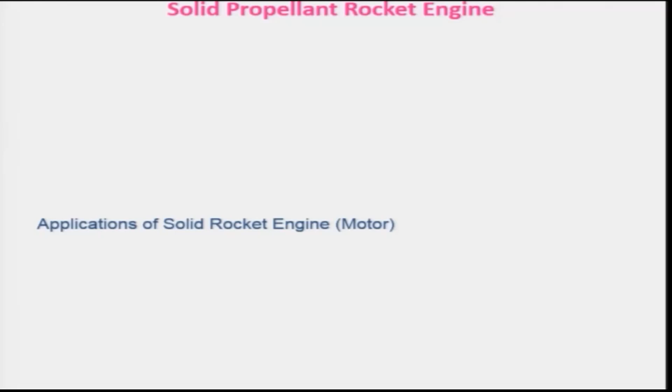Let us look at some of the applications of the solid propellant rocket engine. Keep in mind that the rocket engine is sometimes also known as a rocket motor. So, we will be using engine and motor interchangeably in this course. As I mentioned earlier, solid rocket engines are basically used as booster rockets, which can be strapped on to the main rocket engines, particularly for space launch vehicles. It has been used in our PSLV, GSLV and other engines.

And booster rocket means basically it can provide high thrust for a very limited time, and that is the beauty of the solid propellant rocket engine, that it can provide a very high thrust, although its specific impulse is in the lower range as compared to liquid propellant rocket engines. In modern times it is also being used as an upper stage propulsion system for orbital transfer vehicles, because one can store the solid propellant for a longer period of time, and also it is very simple to design. Besides this, it is being used in spin and de-spin systems for spacecraft.

And solid propellant rocket engines are used for strategic and tactical missile propulsion systems, because of their simplicity, and one can operate them at any time. There is no gestation period for firing a solid propellant rocket engine. And these engines are also good candidates as gas generators for starting liquid rocket engines, pressurizing liquid propellant tanks, and any other place wherever it is required.

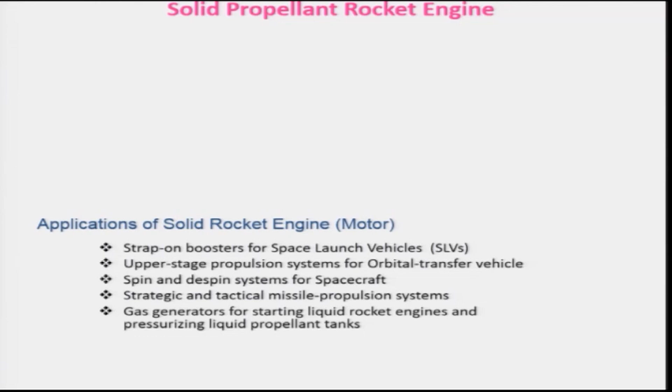And let us look at a typical rocket engine which is shown here. You can see that it has various components, and the main component you can look at is the casing. This is the casing part in which the propellant charge, which we also call the grain, is housed, and it also has an igniter somewhere in this region, which is meant to initiate the combustion of the solid propellant.

So, therefore, in case of the side burning propellant grain, it is placed on the forward side of the propellant, and on the other side it has a nozzle. Of course, the seal has to be used properly, otherwise there will be leakage of gases from this combustion chamber of the solid propellant. So, the nozzle plays a very important role, because in this nozzle the high pressure and temperature gas is expanded to produce the requisite thrust.

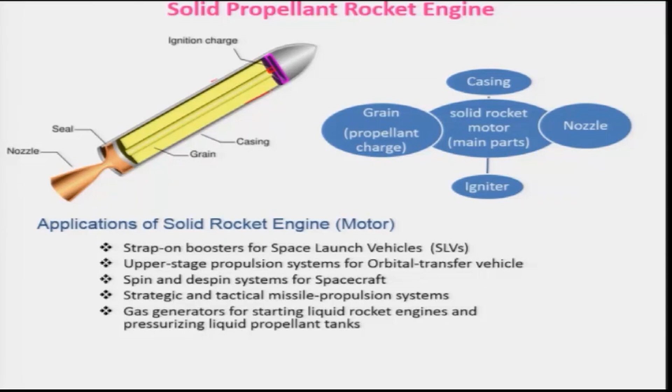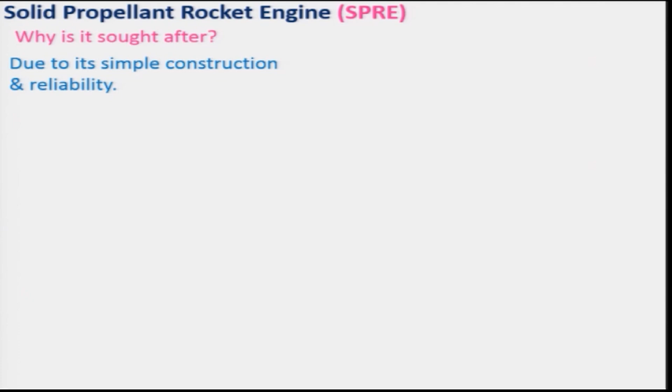Let us ask a question: why is the solid propellant rocket engine sought after? As I told earlier, it is very simple to design and fabricate, and its reliability is quite high. Therefore, it is being used for various applications, and besides this, one can have a solid propellant rocket engine from a very small size to a very large size in terms of thrust. Of course, its specific impulse is a little lower as compared to the liquid propellant rocket engine.

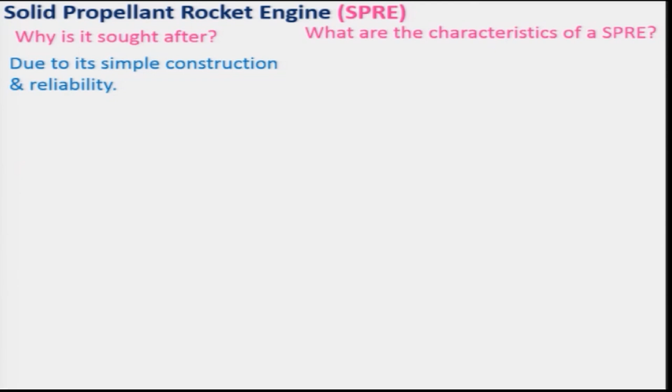Let us look at the characteristics of solid propellant rocket engines. As I told earlier, the solid propellant rocket engine is basically a very simple system. It produces a medium level of specific impulse, from 160 to 320 seconds. A disadvantage of the solid propellant rocket engine is that the fuel and oxidizer cannot be controlled. In other words, one cannot throttle the fuel or oxidizer, as is routinely done in liquid propellant rocket engines. That is the disadvantage of the solid propellant rocket engine.

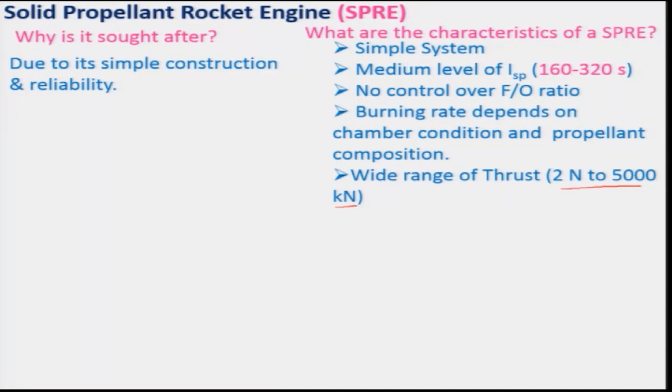Besides this, the burning rate depends on the chamber conditions, like chamber pressure and temperature, and also the propellant composition, and the propellant composition is fixed once the propellant grain is designed. As I told earlier, it can operate over a wide range of thrust, 2 newtons to 5000 kilonewtons or 5 meganewtons, and some people claim one can get even higher thrust. The thrust of the solid propellant rocket engine can go up to even 10,000 kilonewtons.

So, let us look at a few more characteristics in terms of data and compare with the liquid propellant rocket engine, as shown in this table. Storage-wise, the solid propellant rocket engine is quite stable, even for 10 to 15 years, whereas in the liquid propellant rocket engine the propellant remains chemically and thermally stable only for 1 to 2 years. That is why the solid propellant rocket engine is sought after for missiles and certain space applications where the propellant has to be stored in the rocket engine itself.

The burning rate of the propellant in the solid propellant rocket engine is quite low as compared to the liquid propellant rocket engine, and the chamber pressure of the solid propellant rocket engine is quite high, varying from 1 megapascal to 70 megapascals. 70 megapascals means around 700 atmospheres, whereas the liquid propellant rocket engine chamber pressure varies from 0.3 to 10 megapascals because of the limitation of the combustion chamber thickness.

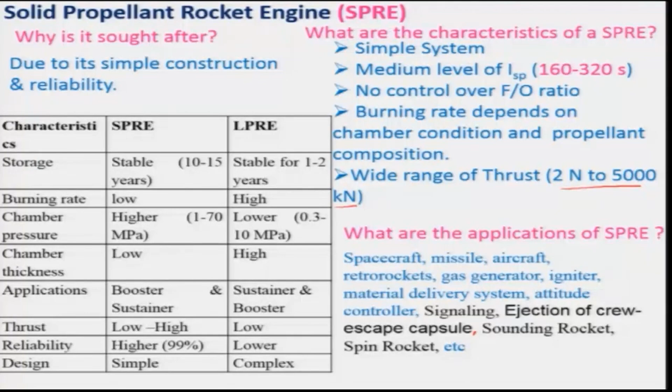Even nowadays people are contemplating using the solid propellant rocket engine in submarines, and even in torpedoes it is being used to attack a submarine, and in several places the solid propellant rocket engine can find application. That depends on the imagination of the user, and its design and development will change according to the requirement. So, therefore, it is important to study the various aspects of solid propellant rocket engines, and let us now compare the solid propellant rocket engine with the liquid propellant rocket engine.

As I told earlier, the solid propellant rocket engine is quite simple with few moving parts, whereas the liquid propellant rocket engine is quite complex with several moving parts. And it can be fired on quick demand, as there is no need to pack the casing with solid propellant, because the solid propellant is already stored in the casing, so it can be fired easily. The liquid propellant engine cannot be fired quickly, as the tanks have to be filled with liquid propellant, as storability of the propellant is quite limited.

It delivers very high thrust levels, more than 5 meganewtons, simply by having a large enough nozzle to expel the large mass flow rate required to attain a high level of thrust without significant design compromises. But in the liquid propellant rocket engine, getting higher thrust is limited due to restrictions in the design of turbopumps, because of which it cannot really be operated at high pressure. In recent time several liquid engines are being developed to achieve higher thrust, but with penalties such as higher inert mass and other complexities, and the tank will be very large.

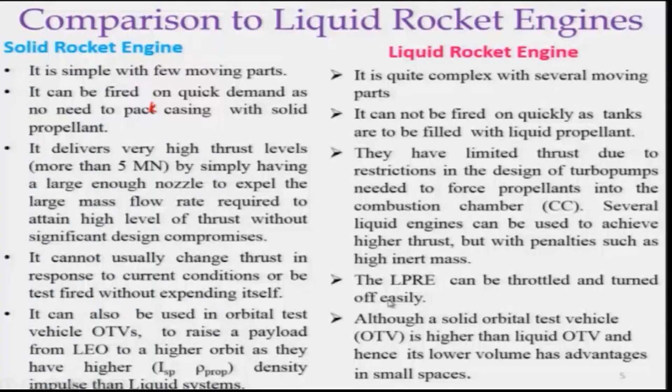So, one has to use them depending on the application and maximize the advantages. That is the reason why the solid propellant rocket engine is used as a booster, whereas the liquid propellant rocket engine is used as a sustainer in the case of space vehicles.

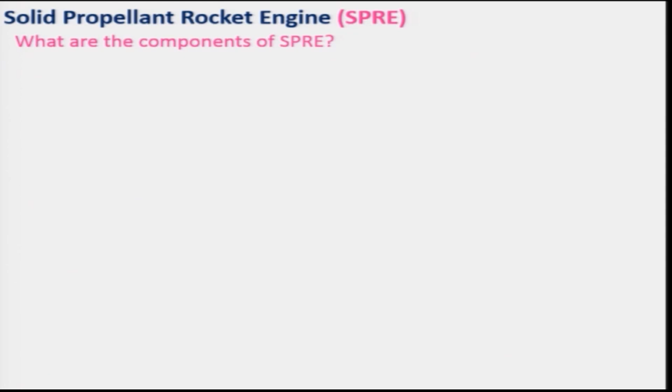So, let us look at the solid propellant rocket engine a little further, and what are the components of the solid propellant rocket engine, which is very critical. Let us look at a cross section of a solid propellant rocket engine. You can see that if you take the A to A cross section here, it looks like that, and this has a casing here.

This casing houses the solid propellant grain, and the casing is generally made of low weight and high strength metal, particularly aluminum alloys, and in recent times composites are also being used as a casing material. The solid propellant grain, which is shown here, will be packed in this casing, and if it is packed in this housing, then we call it a case bonded propellant grain.

In between the solid propellant grain and the casing, there is a layer which we call an insulator, a liner, and the liner is basically used to arrest the heat transfer during combustion. So, it will act as an insulator, and besides this it helps the propellant to be packed properly such that it will not displace when the rocket engine is subjected to acceleration. Therefore, this is a very important component, one has to take care of it.

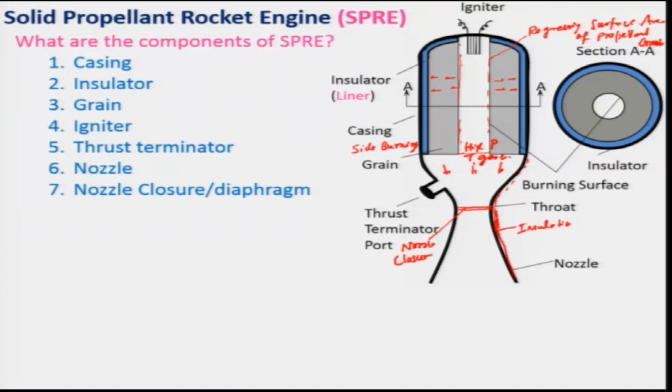Besides this, to initiate combustion, a nozzle closure is used to start with, and this is known as a nozzle closure. It is particularly required in a very large engine. Besides this, a thrust terminator port is used whenever you want to stop the operation of the rocket engine during its flight. You open this port so that the gas comes out, the pressure is reduced, and you can stop the operation of the rocket engine. This is a new addition.

So, let us look at the end burning grain; it has a limitation. If burning takes place in this direction, this is known as an end burning grain. It has a casing, of course, and an insulator; these are inhibitors or insulators. The igniter is located a little near the nozzle or the exit such that the gases come over here and spread over this burning surface.

This is your burning surface, and of course, a diaphragm or nozzle closure is required so that the chamber pressure can be built up very easily and will not undergo any pressure fluctuation during the initiation of combustion. This is your end burning grain, and when you compare it with the side burning grain, you will find that it has a limitation: the burning surface is limited by the diameter of the end burning rocket engine. Therefore, it is used for very limited applications.

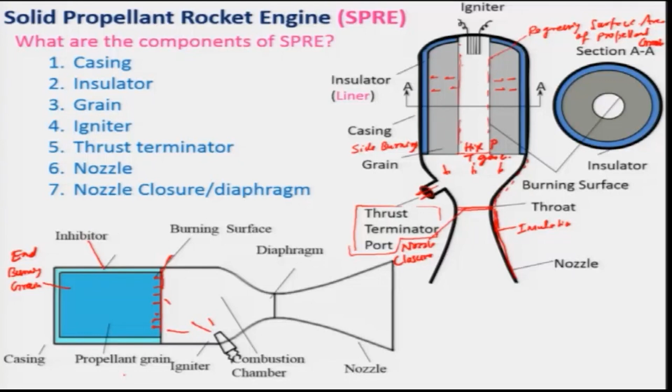With this I will stop here, and we will be discussing the mechanism of solid propellant combustion in the next lecture. Thank you very much.